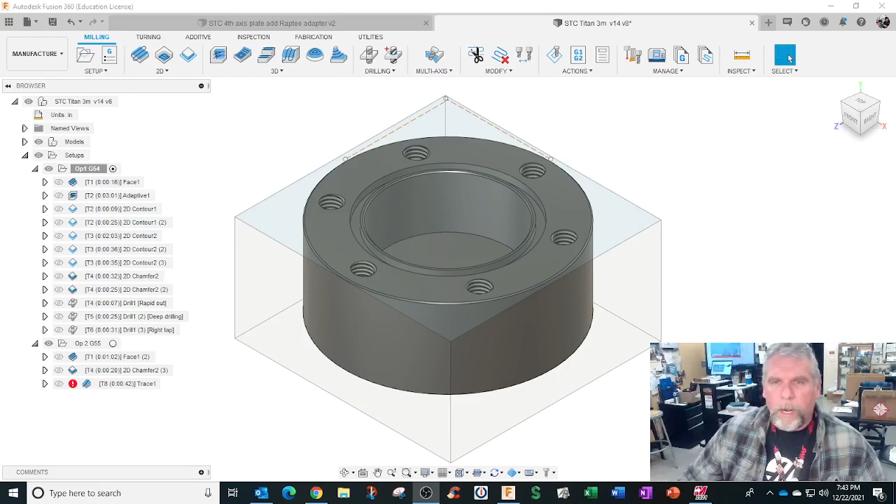Okay, I was going to do this as a screencast, but I have my video camera here and I was at school still. So I will demonstrate up here. I actually drew the material on this one, mostly for a discussion of the Titan method of material.

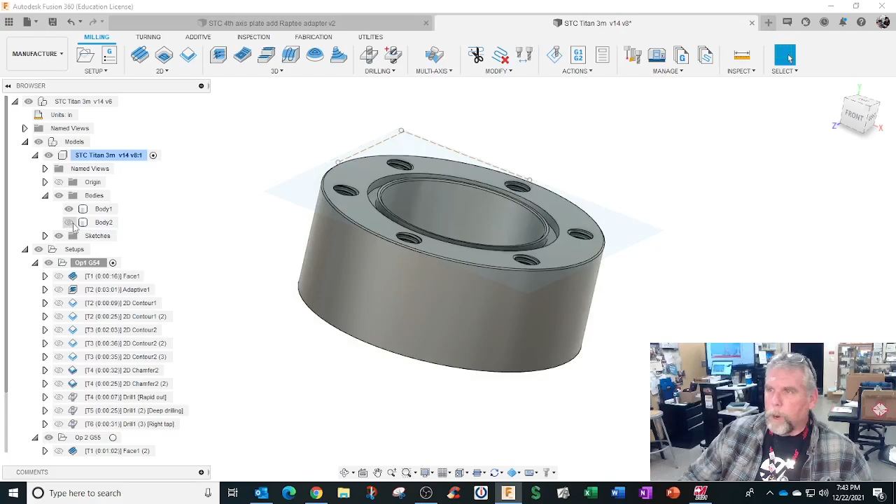So we got this body right here, the extra body. I'm going to just shut the sketches off in that body. So we got a round part. We can make this out of 1x2 material. So we got to edit the material, and you can do relative size or fixed box. And up here, I would put in the size of the material. So I'm going to use 2-inch wide.

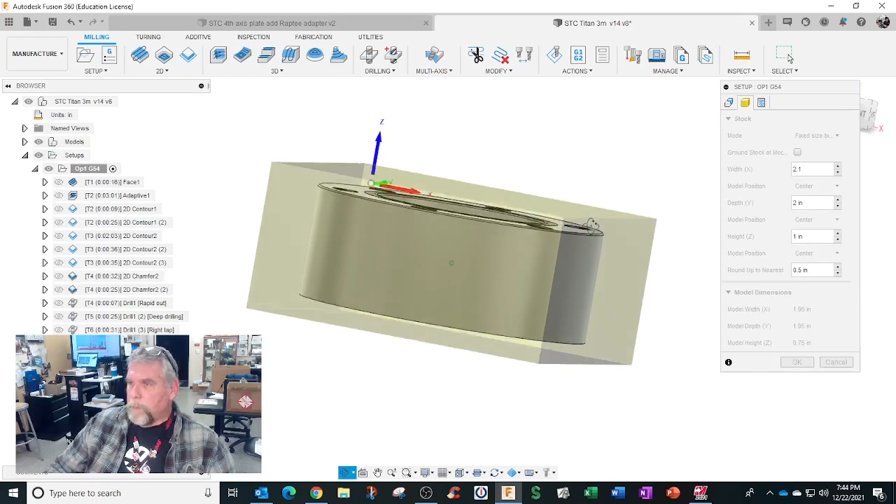Move me out. 2-inch wide, 1-inch tall, and I'm going to make it a little bit longer than 2. I'll make it 2.1. Even though this is round, it really shouldn't make a difference. And I usually make it so I have a little bit of material on the top. 10 or 20, 10 thousandths is fine. Which leaves me with 240 thousandths of extra material because the model is 750 tall.

That would work fine. I always do this last one here. I labeled it. I accept the program number, label it. Now I'll even call this WCS number 1. If you use 0, it'll default to G54.

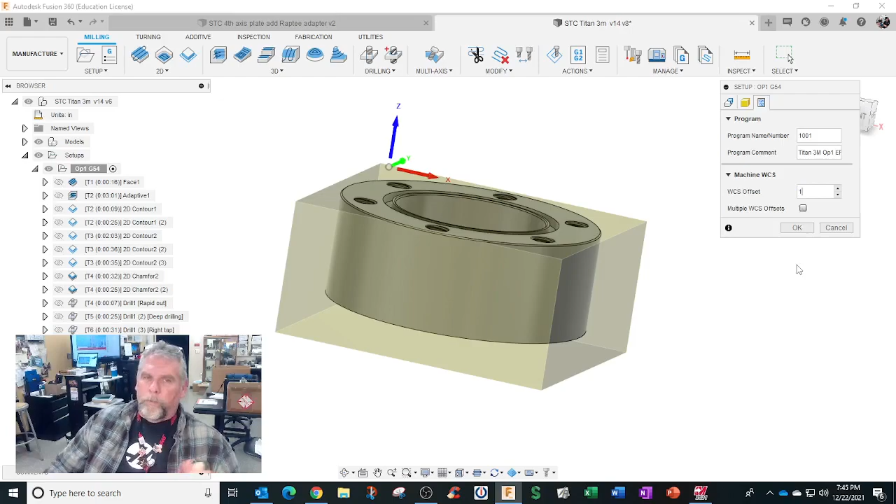Okay. Now for doing the Titan method, where do we put the XY? The easiest one is stock. Use the corner. The corner of the top. There's a probe that'll do all 3 in one shot. Place it over the top, cycle start, and it'll do the top, it'll do this edge, done.

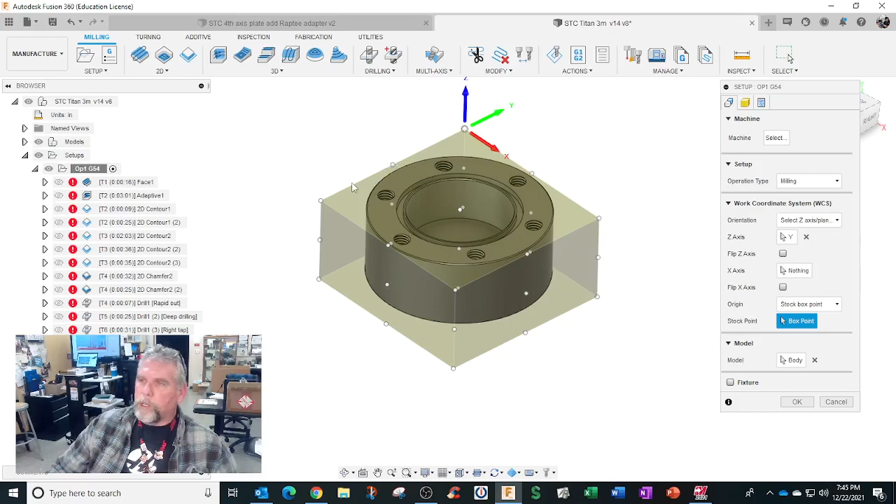I saved that probing program and I had it shift because I haven't matched the Titan sheets. It's working out good so far, but some people forget the shift and we end up with the left and the front barely cut and the top's barely cut. So the first operation is hard to mess up. If you use the stock and get enough material, I mean, the biggest mistake we have is people aren't cutting them long enough. But if you have the bar stock in there and it's big enough to do the project, that will get you right there.

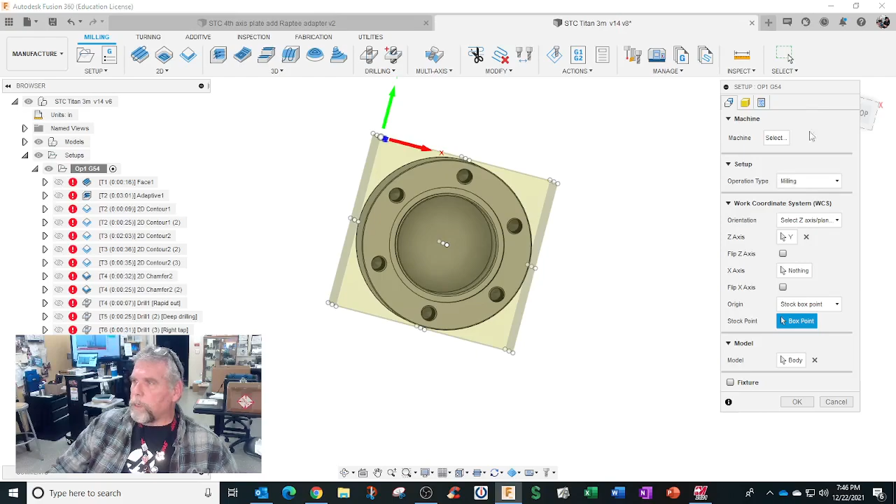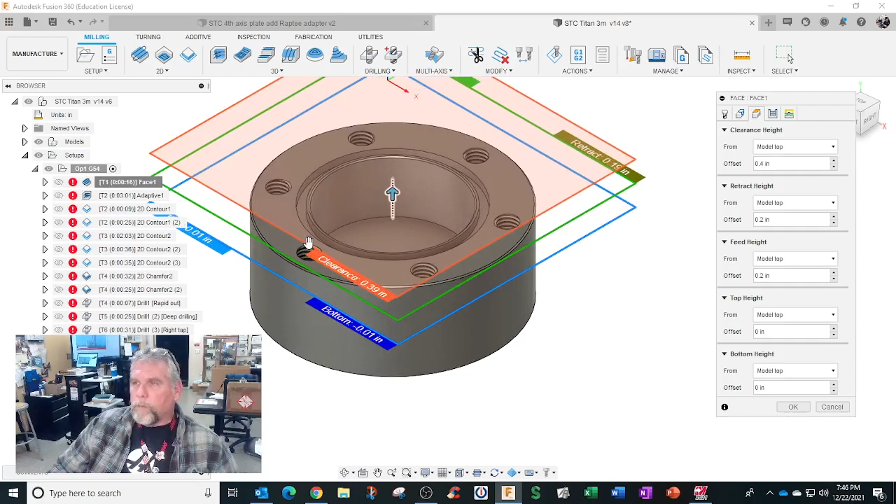Just make sure when they're looking at it. Now, for following the Titan projects, he's telling you exactly what, but we have enough room in there to make that part. So we do a face mill on the top, and Titan teaches all model tops. We do model top everywhere, and the bottom cut is the top. If you're using stock box top, and I have it shifted 10 thousandths, the top is 10 thousandths.

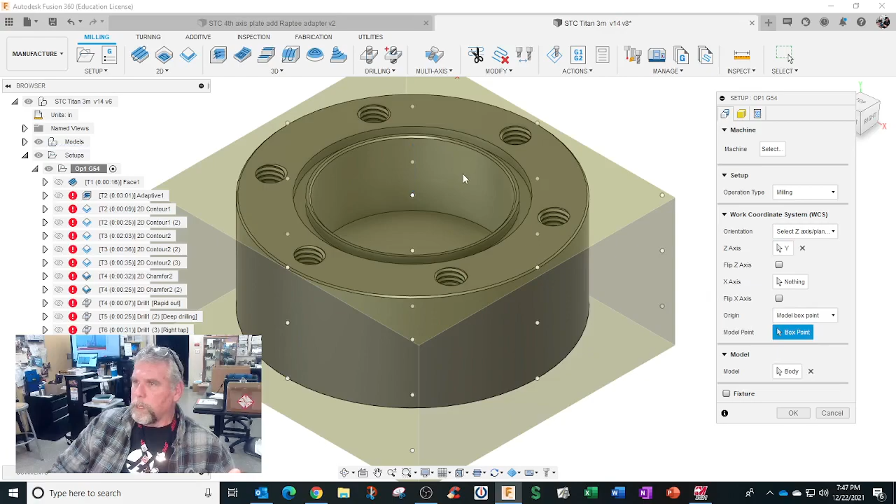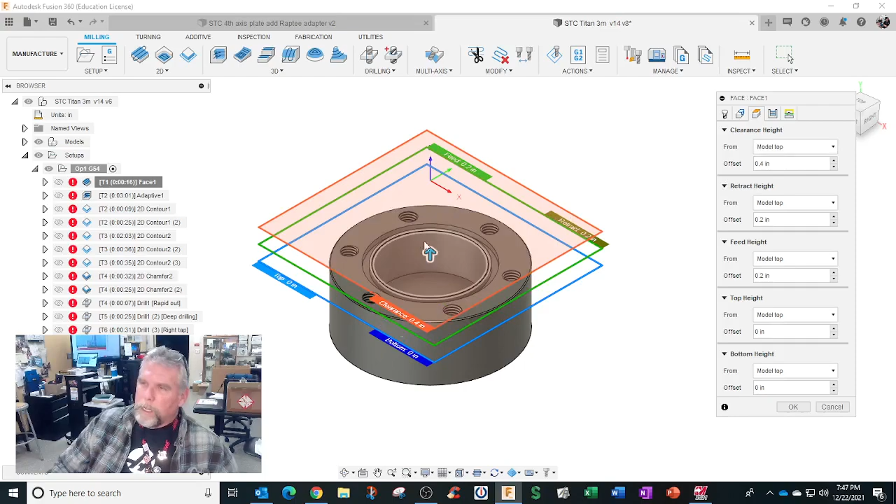I believe why he teaches it that way is the top will be Z0 in the G code. So there's pluses and minuses to doing it either way. So we do that one there and hit OK. Do the heights on this side. The model top is 0. Part will be Z0 in the code, and everything else will be referenced to the model. There isn't much on top, not much to worry about.

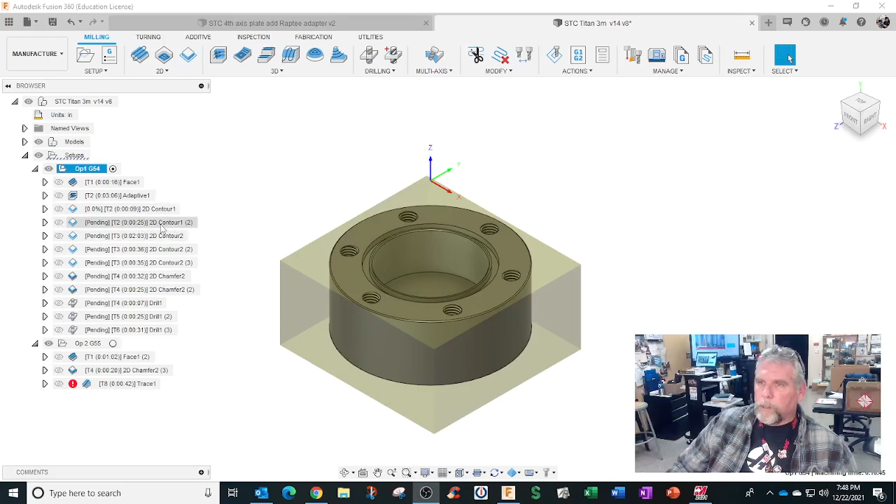And then we get all the roughing stuff. So I'm just going to regenerate all these just to get them done. So we use 3D adaptive. It's actually much better than 2D. It actually does pretty much everything for you. And it's not the fastest computer in the world. And this one here, we haven't chosen the tool that's supposed to be in there. Actually, this one I did before I gave them all a custom sheet. So this one I have to update.

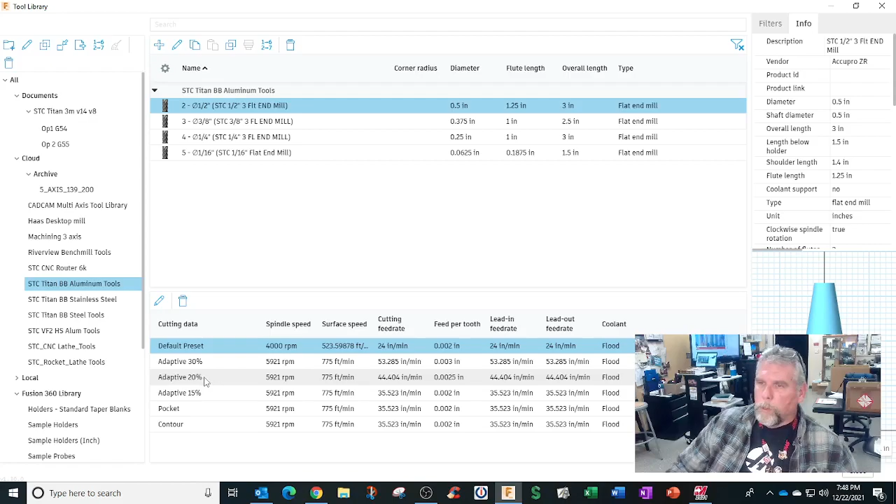Go to my library. Everything's in the cloud. Building block aluminum. I'll go get my mill, flat end mill, just to narrow down the selection. Say use 0.5 or ½ inch. And right here, these are my feed and speed settings. I could tell that older tool did not come from this library. So I told them in the TM1 machine, I'm going to update this one. We want to do adaptive 20. Nothing more than that.

It closed, but if they forget to do that, up here, I guess I didn't pick it. It went right to the tool library. I didn't pick it for this thing. Building block, ½ inch, adaptive, select, and now all the feeds and speeds are done.

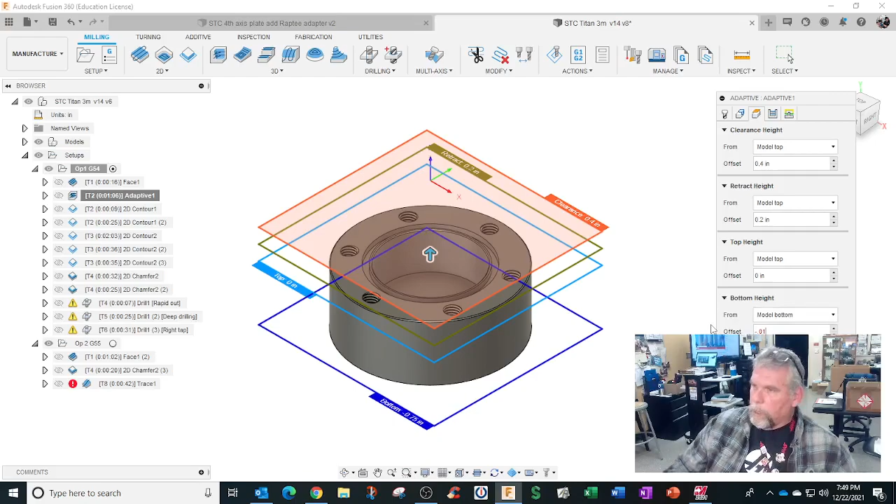We got the stock contours, rest machining. This is the nice thing about the 3D adaptive. All the heights of model top. We do model bottom and give it just a little extra on the bottom so it goes a little bit below the bottom. And we put stock to leave on here.

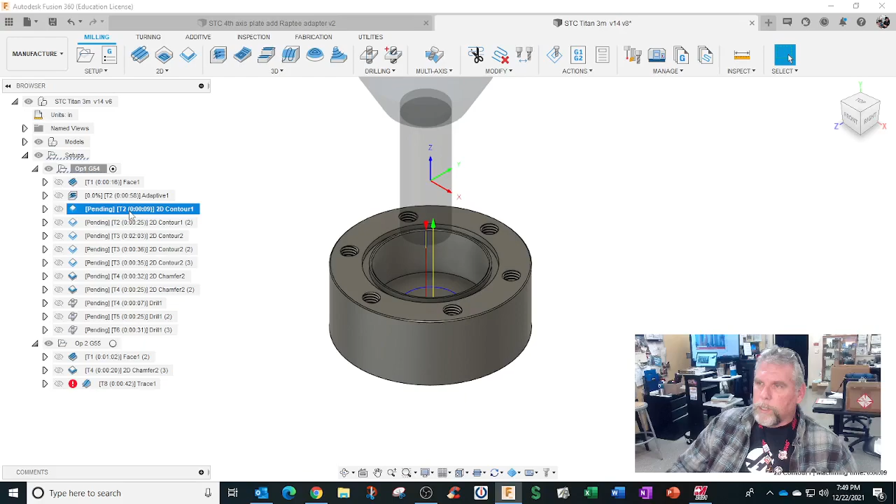And the way I have it set up, where the heck is it? Optimal load setting is based on 20% of the tool. This is kind of like an unknown area of this. Okay. And the other stuff is like same tool, and just go in and pick your feed and speed selection. So this one needs an update here.

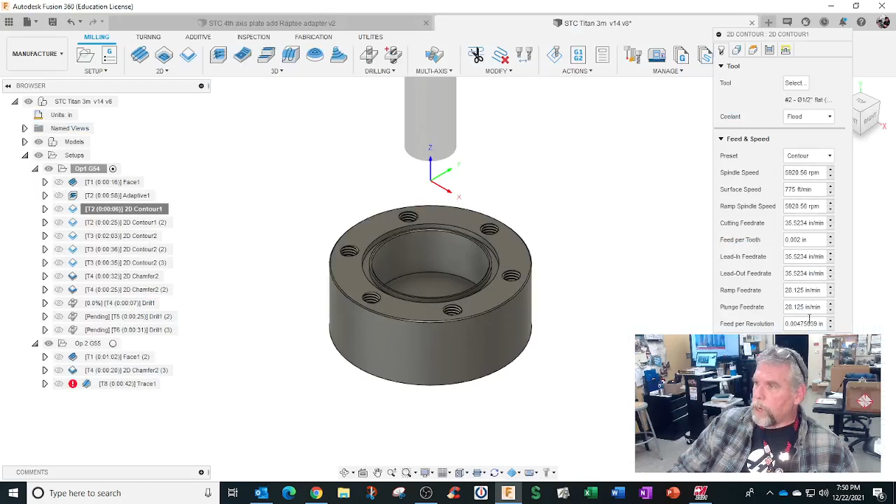I have two tools here now. I could tell the STC one is the updated one. I'll pick contour because that's a contouring profile. There's contour right there, the feeds and speeds master machine. So anyway, we go through all this.

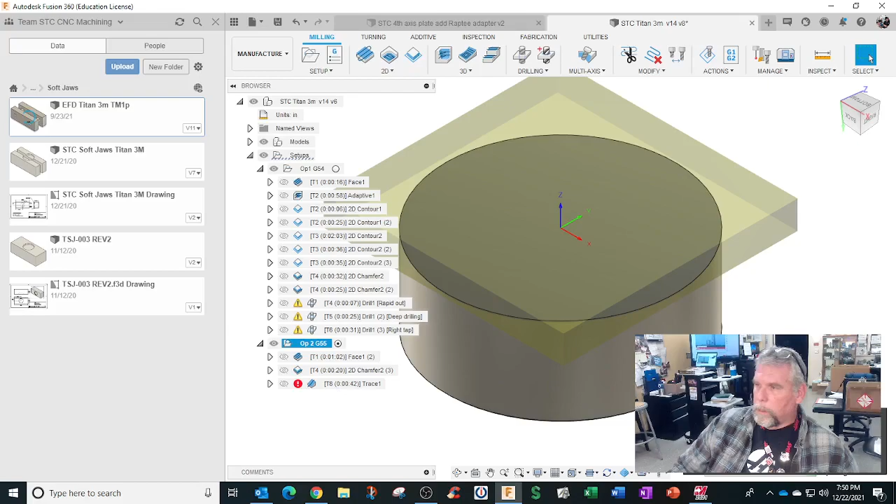Now let's talk about operation 2, which is in a round soft jaw. So we got soft jaws right here. Original Titan models and the ones that we made. Let's see if this is correct. This one here. Oh, this has the wave up to flip. Here's soft jaw. There they are right there.

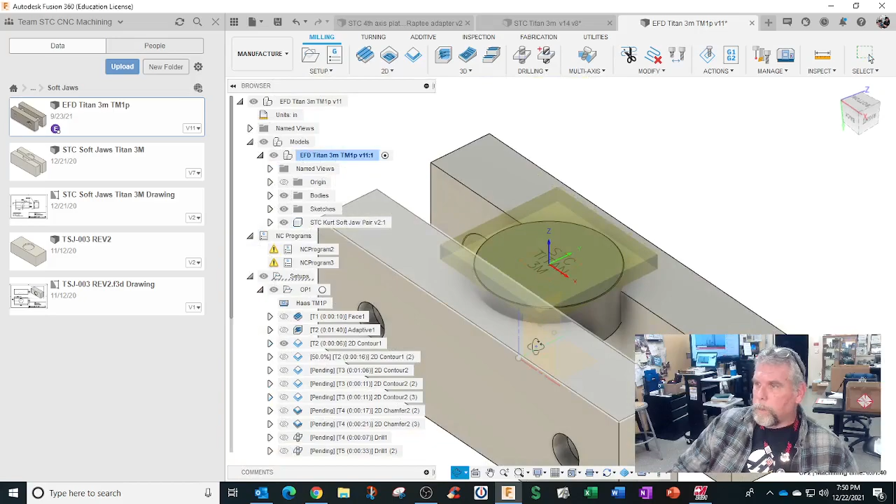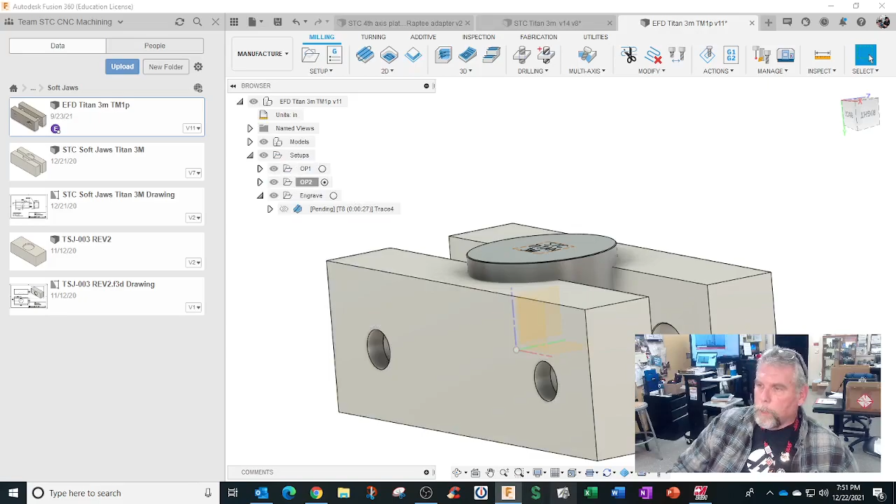I'm going to close up NC program. Okay, so this is like the whole enchilada. I got op1, and if you have this sync view with active setup, and you click right to the right of this one, it'll flip and orient to the home view of that operation.

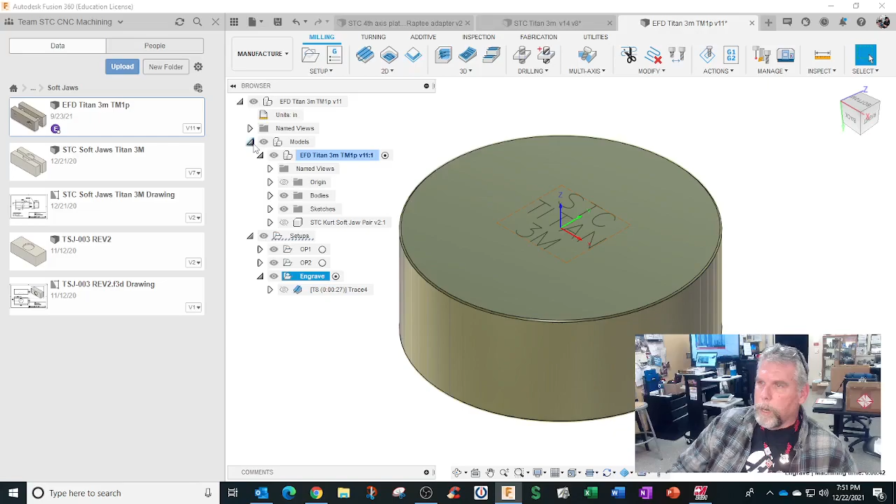I used to go and make all these multiple views. I don't need to do that anymore because now it's synchronized. If I click to the right of op2, it's already synchronized. We added engraving. This was just an add-on. Then I can turn on my jaws. This is not the soft jaw program. This is just bringing the jaws in. I shut the body off and shut all this other stuff off.

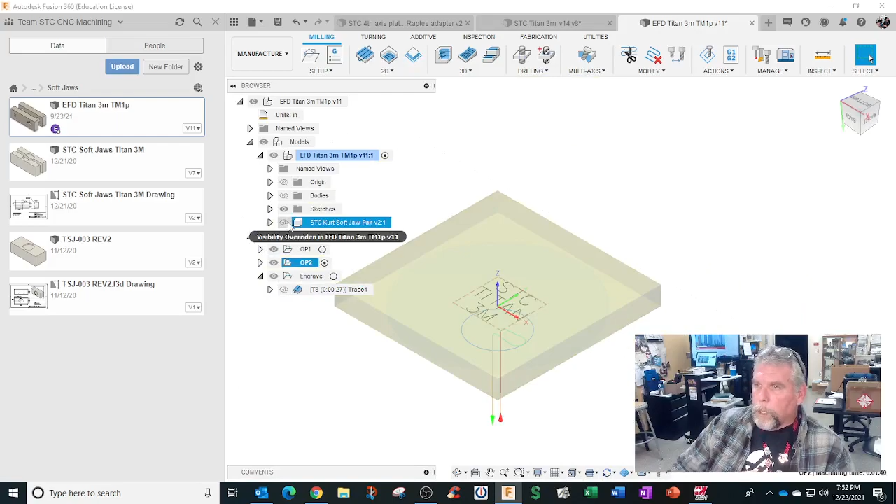The only problem is it's trying to put in the stock material. It's on. Well, I actually didn't cut the jaws in this one. I just did it for demonstration purposes. Let's see. Soft jaws. I don't think these are my updated ones. I have some on the shop floor.

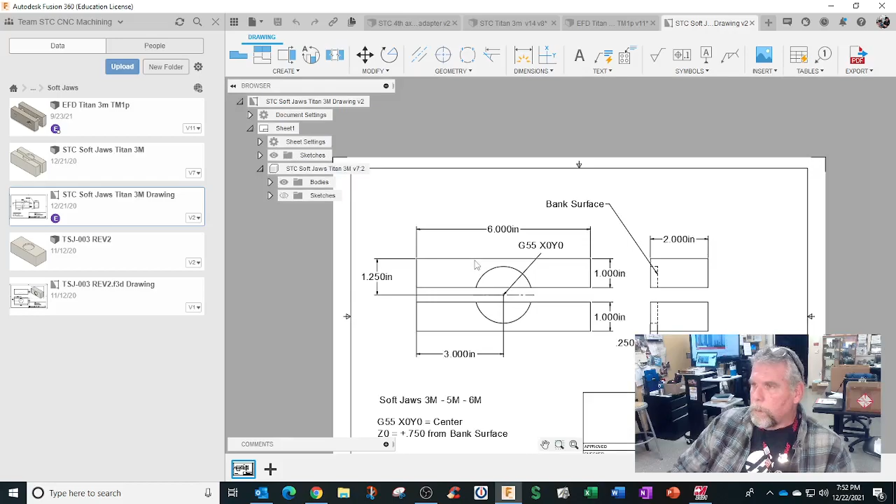All right. This is how we get to the jaw. Well, actually, we have ones with a bored hole in here, but 3 inches to the right, 1.25 down. So if you go probe the side of this and shift it to here, our G55 X0 Y0 is the center of the part. And we got it captured by 250. We made some deeper ones for all three that could fit in there. 5M needs to sit in deeper. And we say here, the Z0 is 0.750 from the banking surface.

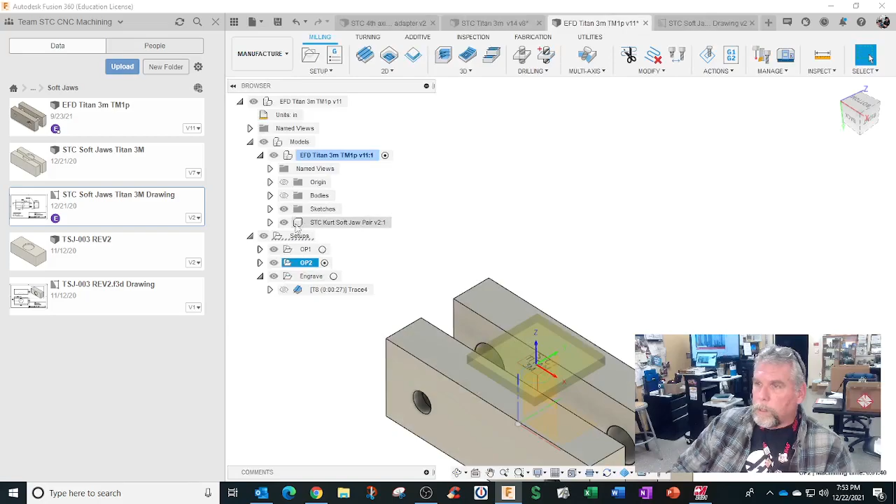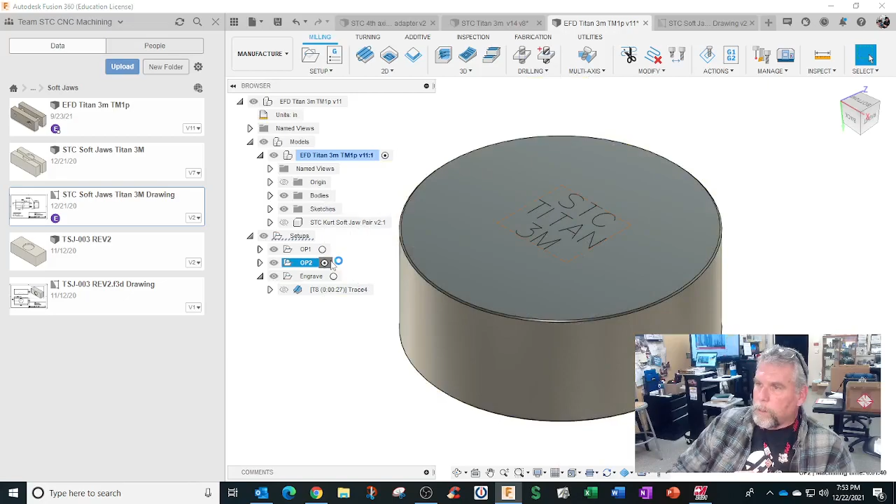Now, let's shut off these jaws for a second to turn the part back on. This is what I call my fake material setup. Right up here. And I do this negative 750, but you don't need to do that anymore because now it has from preceding setup, use rest machining. And when you click on this, you turn on stock visibility there. It's actually updated to reference the first side. So I used to fake the stock out. So that's really what you have on the second operation.

When you go to simulate, I get too many things open here. All right, I'm using comparison mode. The blue is extra material. The green represents finished model, and red means you cut too deep.

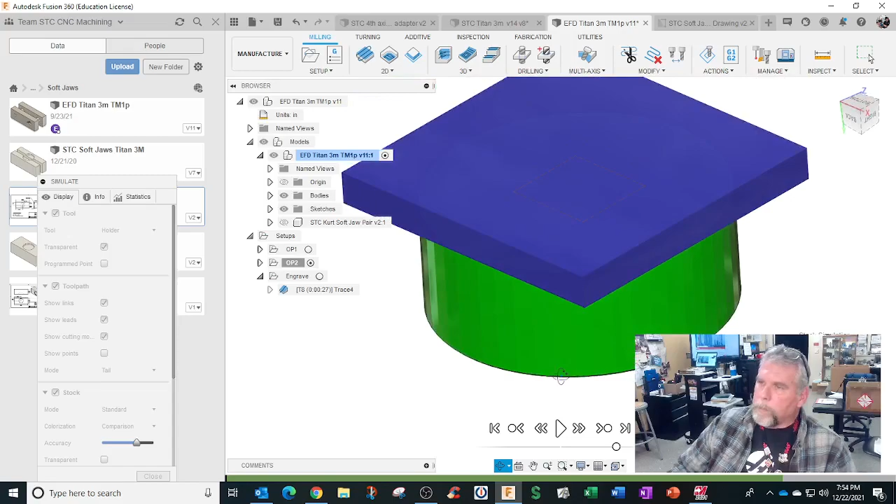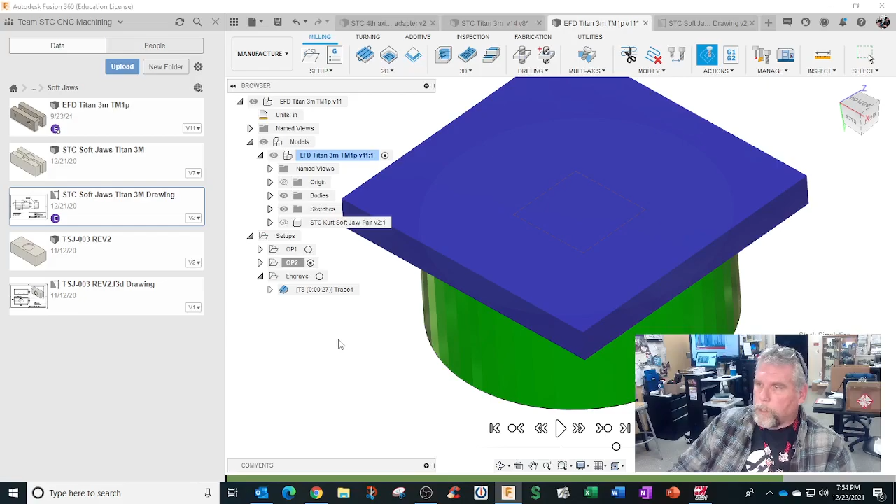I used to use operation all the time, so it would change color by operation. That's like a standard. We've really gone to this comparison method. You can tell if you cut it or not. So in this one, it'd cut the top. Let me back this up.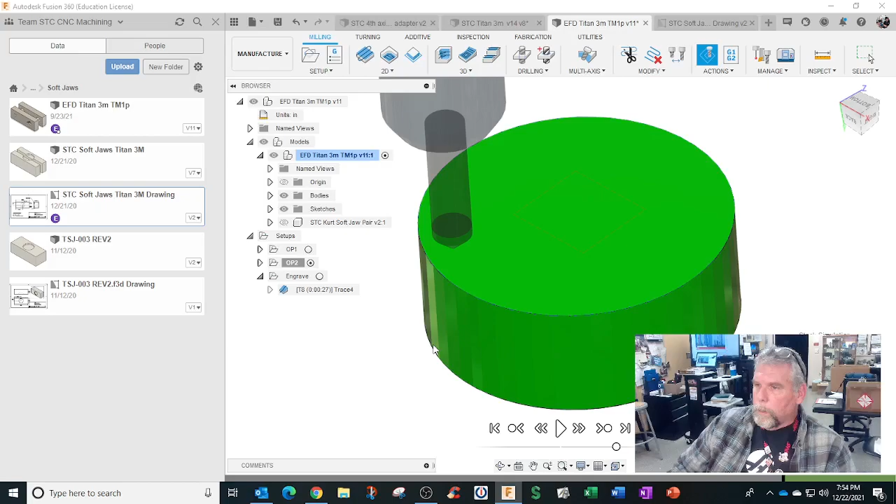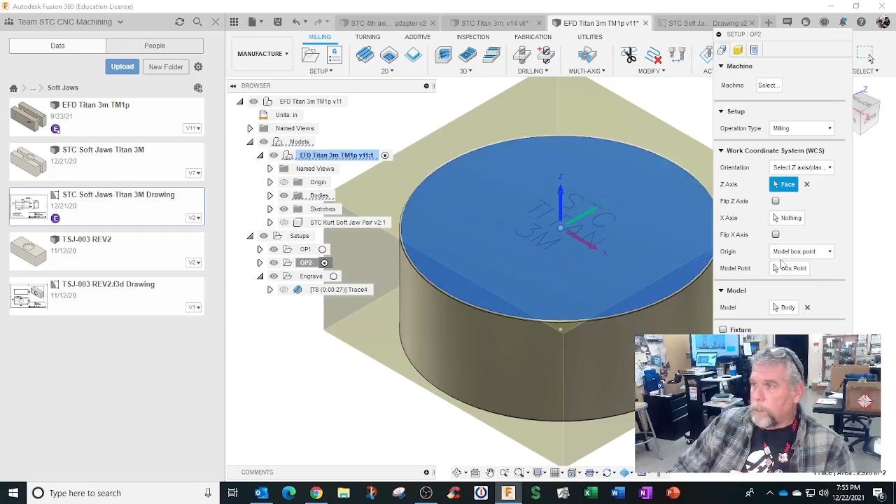Okay, my XYZ. So I set mine to cut off that stock visibility. Edit the top of the model box. Now, could I set it to the bottom? Sure, I could. I could set it right there. So when I go to set it up, I just need the center of this and the bottom. That's it. How do you find the center?

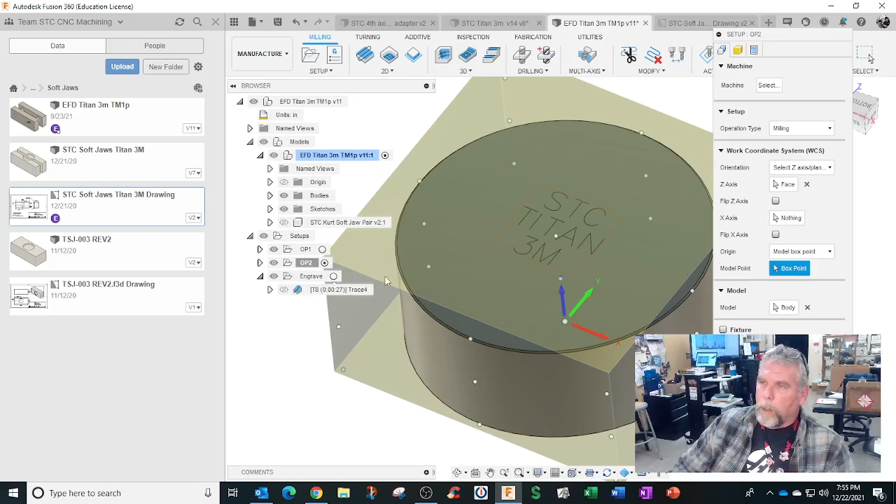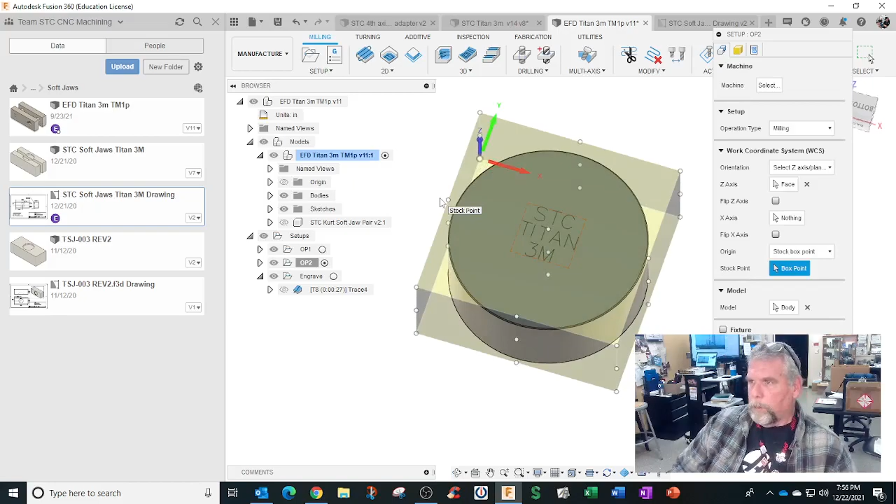This has no hole in it, and this big chunk of square material is going to be on top, so there's no way to get there. A lot of people think you can go from the corner there or down here, right? It's not accurate enough. Remember, this is raw material, and this will get you close, but not within thousandths or less than. You want to be accurate to a thousandth or less if you're going to make parts for aerospace or anything like that. Just making something that looks cool, it might be close enough.

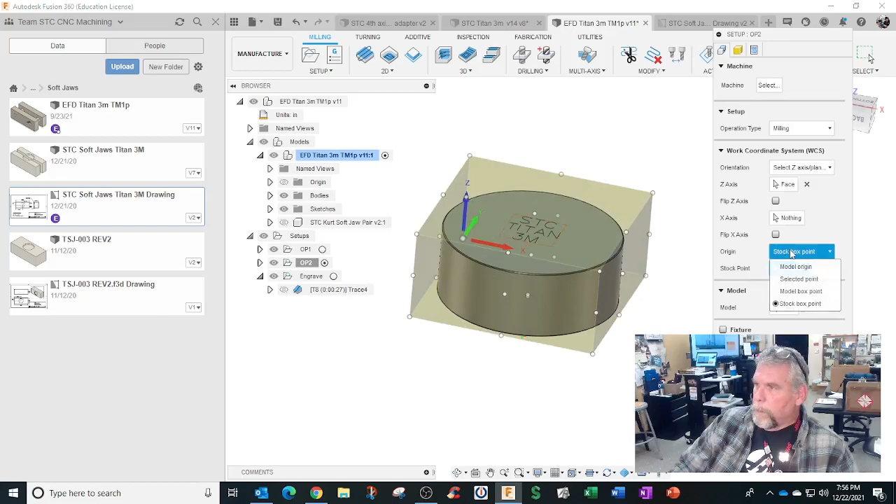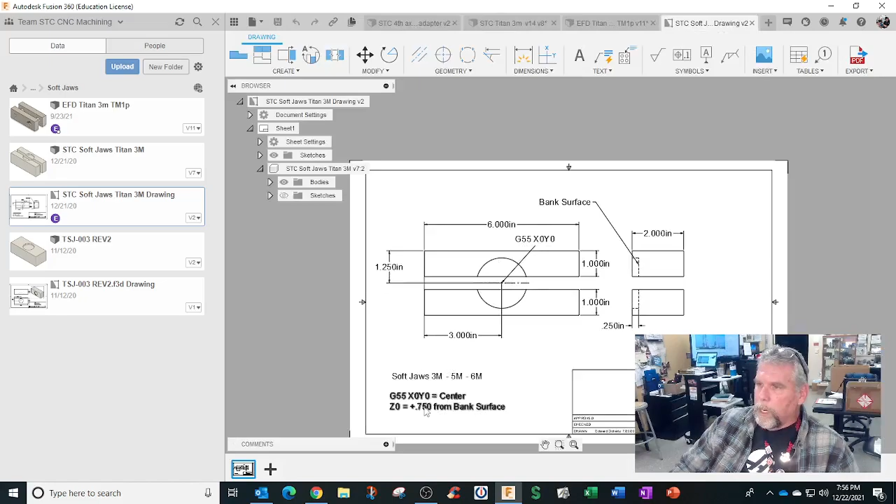I'll tell you what happens if you try to chamfer anything on the second side. A couple of thousandths is very visible. You'll see that you're not aligned to it. But if I did model box point, the corner wouldn't make any sense on a round object. So that's why we go center. You did that. Then when I probe the bottom, I'm done. Probe the bottom. So my plan of this one here, I would just say Z0 is bottom.

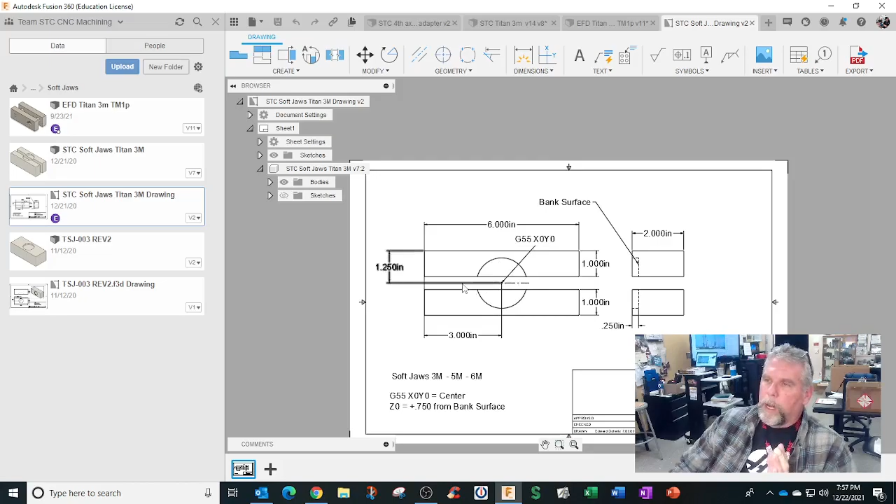Done. We still had to get from the corner here, or we would bore a hole here and write that it's 2.5 this way and 1 inch up. So it's like probe the center of the hole, and there's a lot of these soft jaws where we don't machine the ends of them. We bore the hole, probe here, and shift to the middle. So you try to pick the easiest way to do it, but at some point you gotta do a little bit of work.

But if you want them not to crash into stuff, like if they probe the bottom and they forget to shift up, then it might be a crash opportunity. That's why when we bring this down, especially on the first tool, I have them stop when they're about 2 inches above there. We're going to look at the distance to go and see what it says. If it says minus like 4, it's like no way that's going to make it. Something's wrong with that setup. We'll say, oh, I forgot to shift it up.

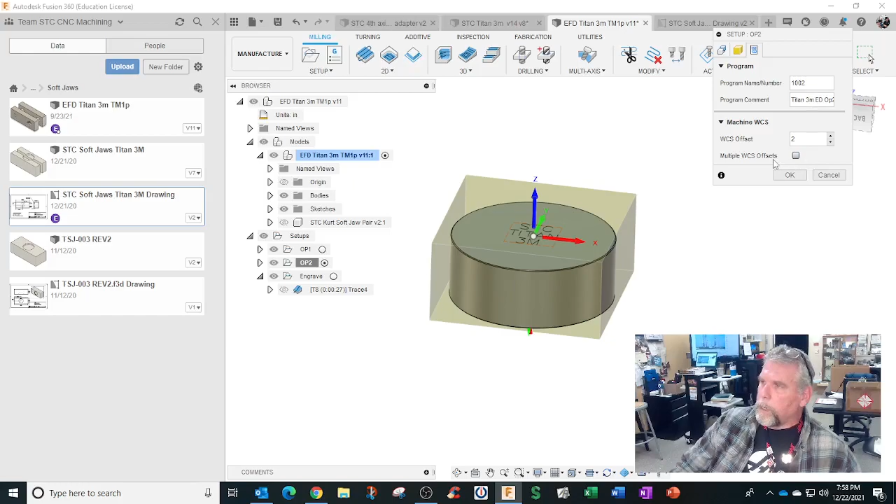So if you want to make it more bulletproof, if we did edit, I'd make this WCS 2, so I have 2 different setups, just in case you have to make another part, but I get them in the mode of how to make 2 operations and separate them. You can label it up here. It'll be WCS 2, which equates to G55. And if you want to use the bottom, and you set Z, you're done.

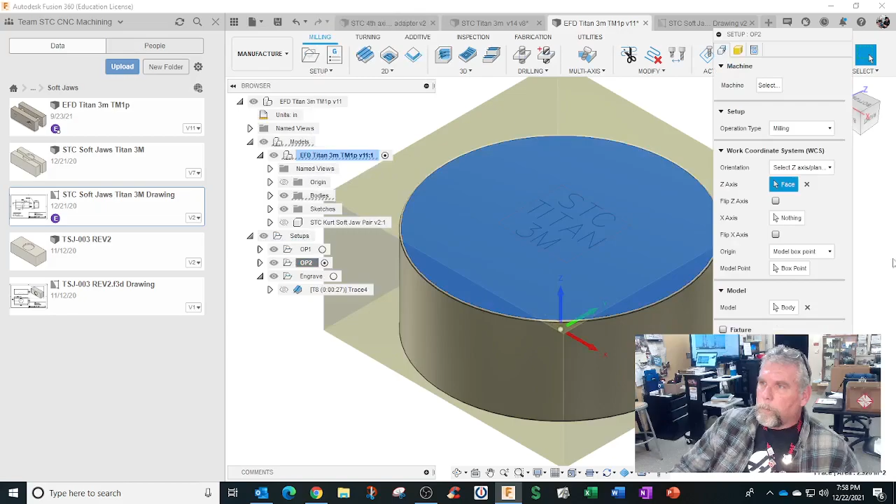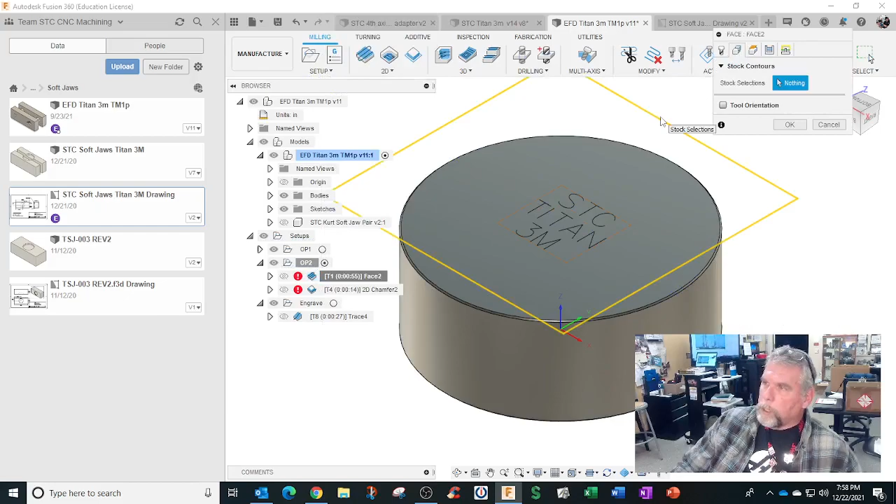So in operation 2, the other thing is you have extra material on the top. This one. And first operation is face mill. That's what we use. But you can use an end mill and like dynamic rough the top. We've done that on tiny parts before. So we use the stock that has been identified and the height. So we don't use model top. I make them do everything stock top except for where's the top, where's that finish line.

So in the program, the top of the part's going to be Z positive 0.75. A lot of people that were hand G-code guys would never program it this way. They'd always program it like the top of the part is 0. These would be all positive numbers till you get to 0. If you did like the top of the material down and made this some negative number, that's kind of getting off the beaten path. But in your G-code, that's going to be your positive number. And up here is going to be where you're starting from.

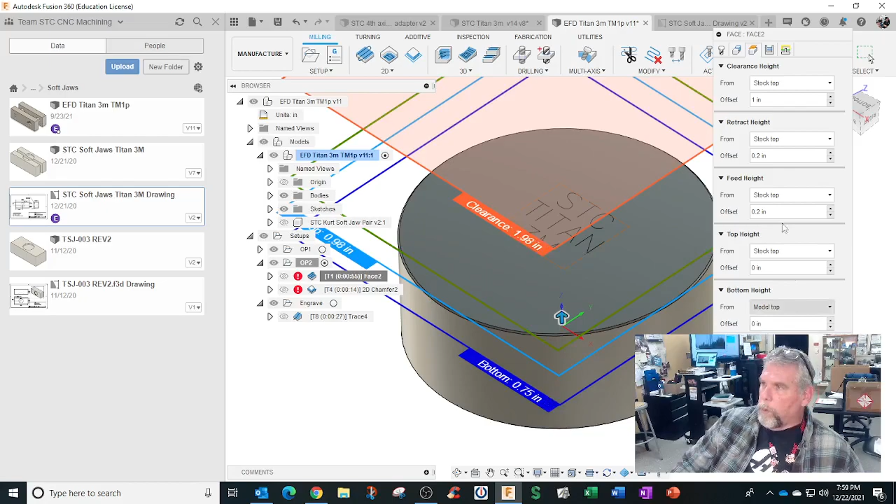And if you have the multiple depths turned on, and we do a finishing step like 5 thousandths, then plus you can control the feed rate separately. So we'll do maximum step down, multiple, or make them even step down, so they're all the same.

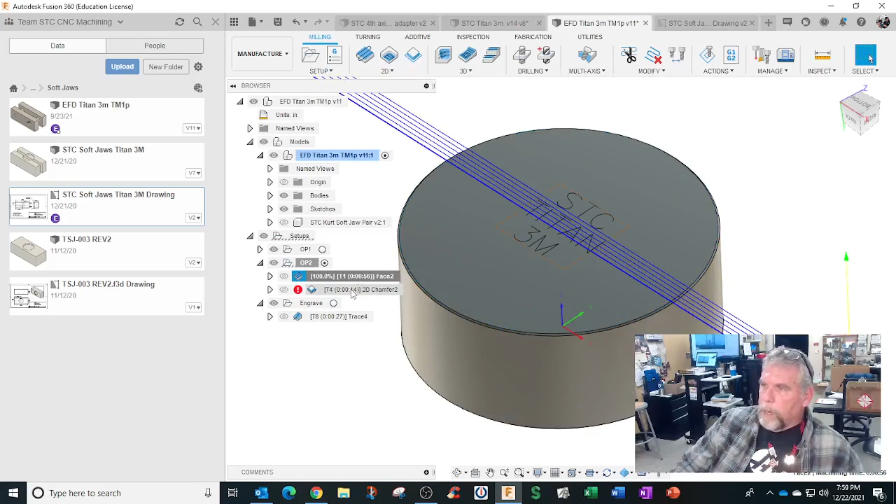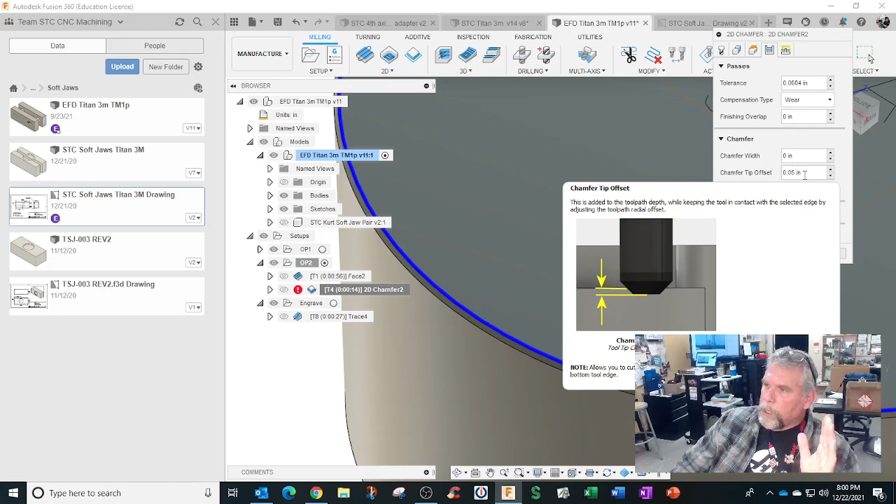Number of step downs. Now the chamfering also, to be aligned correctly, we can't go off the material. So the same thing here; all our heights are going to be model. We can use model top because we've removed everything. We got model top on the top, and our chamfers, if it's got a modeled chamfer, we put 0 here. This will get you a cutter compensation for adjustment, but we put tip offset, which is the down part. Plus these little tips come up. We use that as a standard setup, and we don't have to worry about clearing anything.

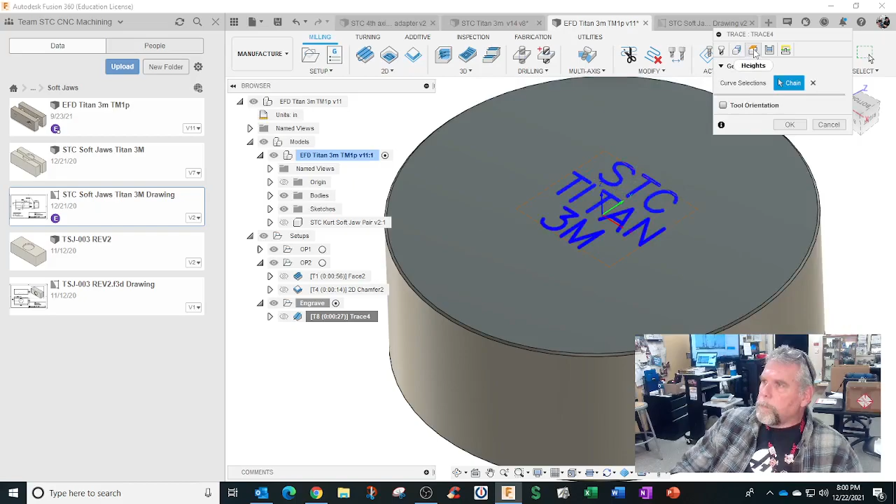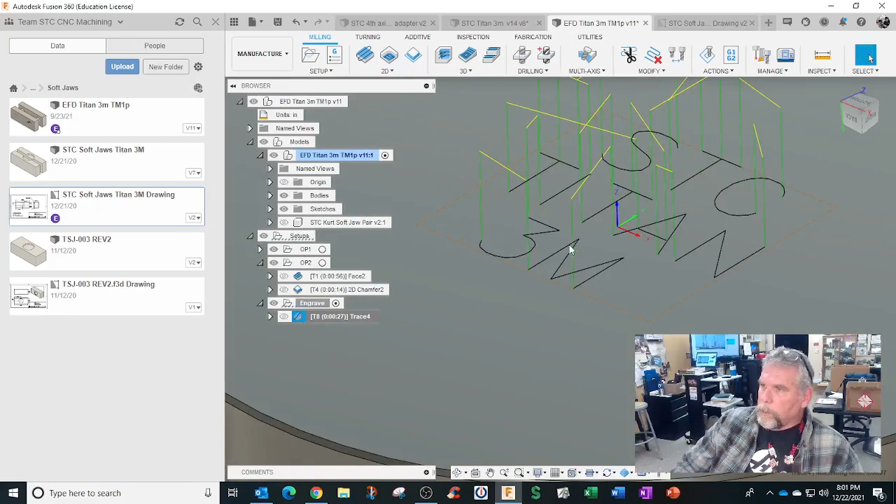And we always add in this engraving, so they'll put something in here, and we really don't use engrave anymore. We use trace. Trace is much simpler. Trace, you click on it, you're done. All these are model top. These will be the offset from the top. And here is axial offset. That's the depth of the part, right? How far the tool's going in. We always put it negative 3 thousandths, so we want no lead in and lead out entry. So that's actually just going to engrave those.

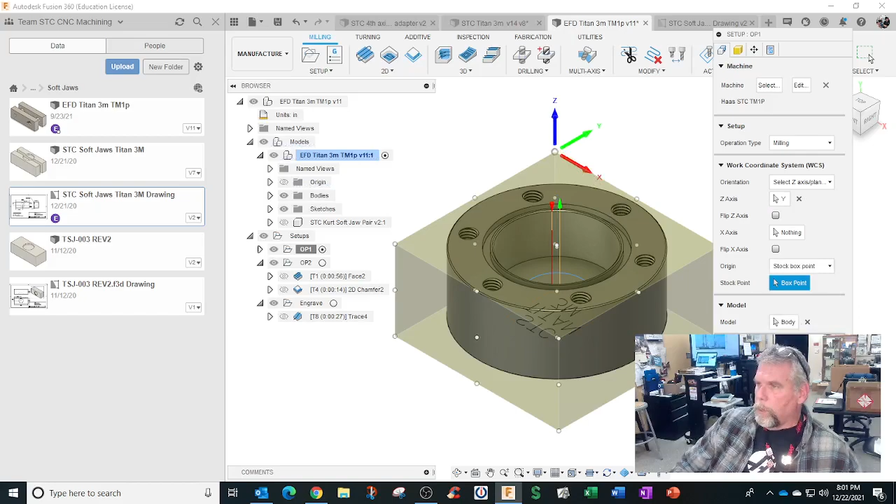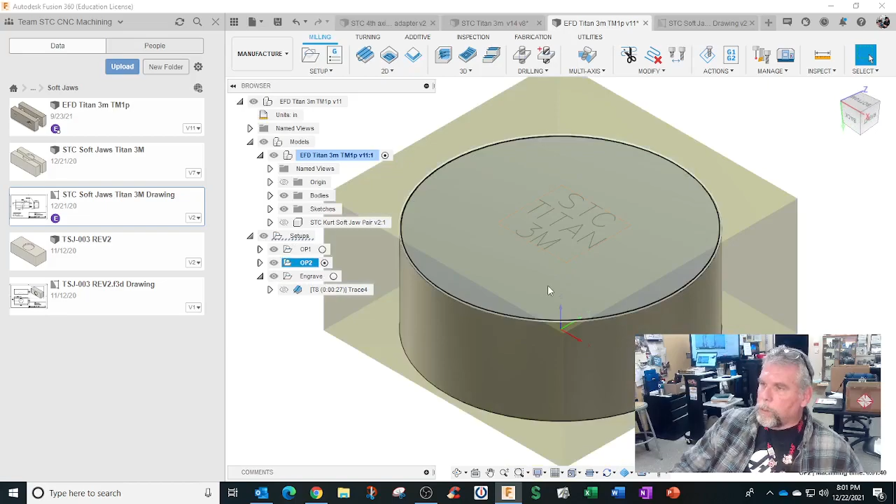So as far as where do you put the Z, you got op 1, you got raw material corner. Using stock box point is the simplest and really bulletproof method right there. Stock corner, set it up, set all the tools off the sensor, or if you're doing top of part with manual touch off, you'd edge find the corner and set all the tools off the top of the material, you're done. Operation 2, we want to be related to the model, so if you want to pick center of model and bottom, how do you find the center? You could do it from the corner of the vise jaw, but you'd have to have the same exact vise jaws in there. That's why we pick a known location and we write it down.

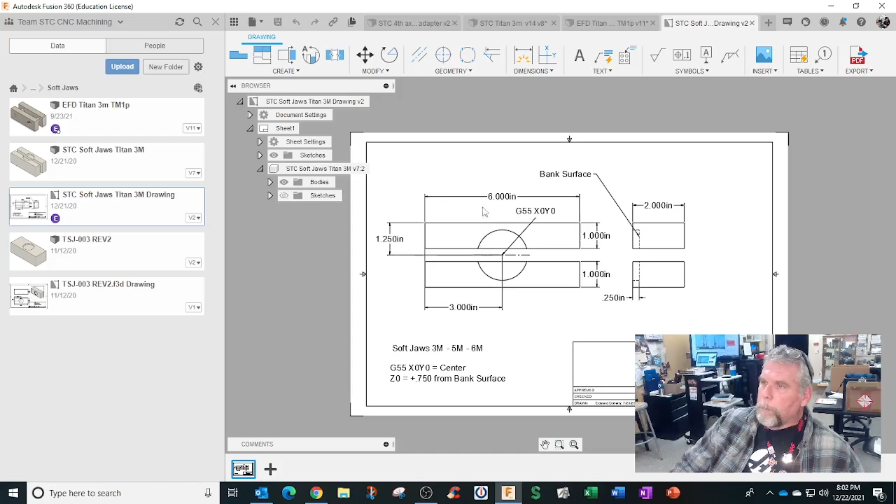We got a blueprint here. It's like a map, how to get to the middle. We spell it out here. This is where our XY0 is going to be. And we put it in here. Z0 is the bottom and shift up. Now you can put this as Z0 is bottom. But in some cases, if you have a round object in your part, you can get access to it. But you try not to plan around that. I'm just trying to plan if the part's rectangular and you don't need a soft jaw, we would just lay it in there.

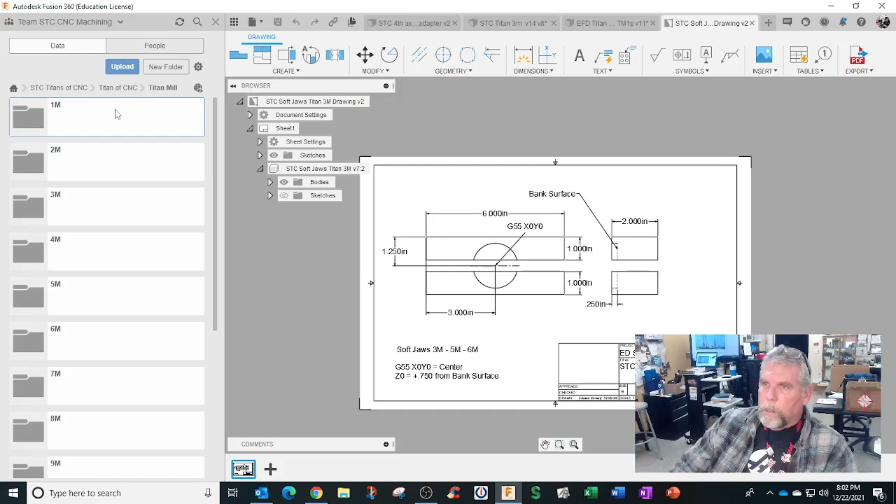Like this one here, rectangular part. The fastest computer here.

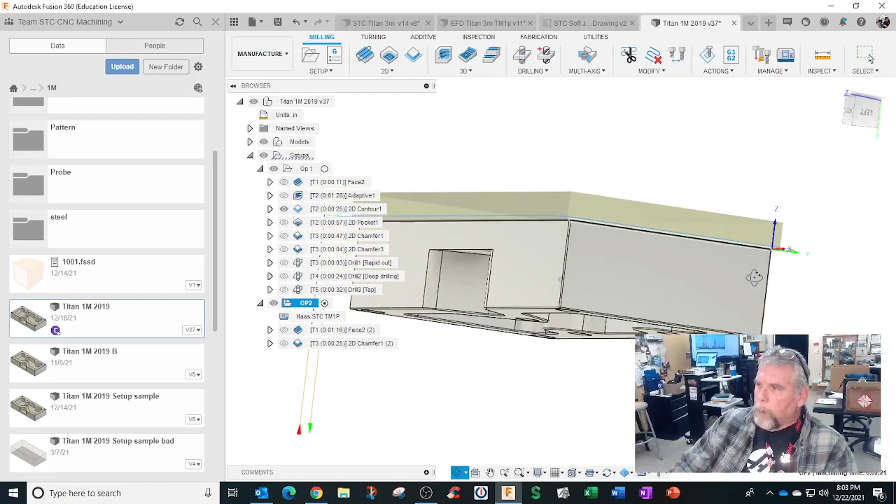It's a rectangular part. Our operation 2, got operation 1, which is the upper corner. Technically, in industry, you want to be related to the datum, so we use the opposite corner. Not really necessary if you only got like one vise, but we're aligned to the corner. So all we do is we put a 1, 2, 3 block in there, probe this side, this side. You can't use the material because this is hanging over here. You can't probe that. It's unprobable. We put in something to simulate it.

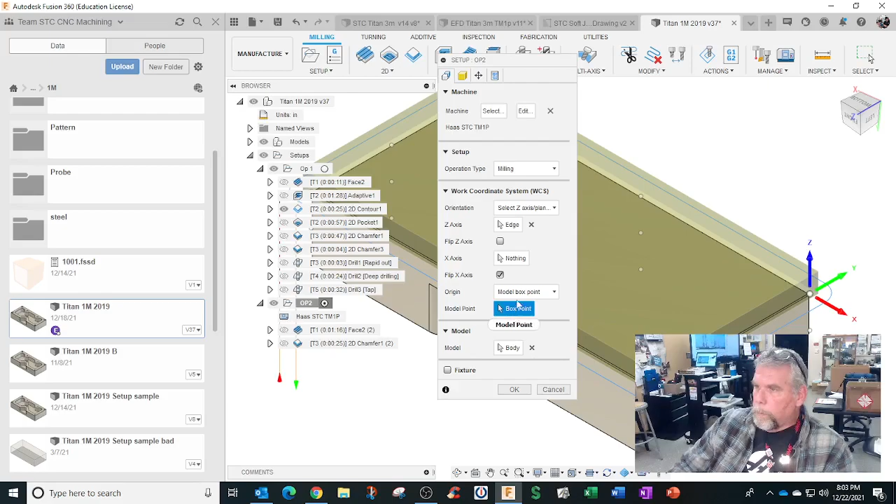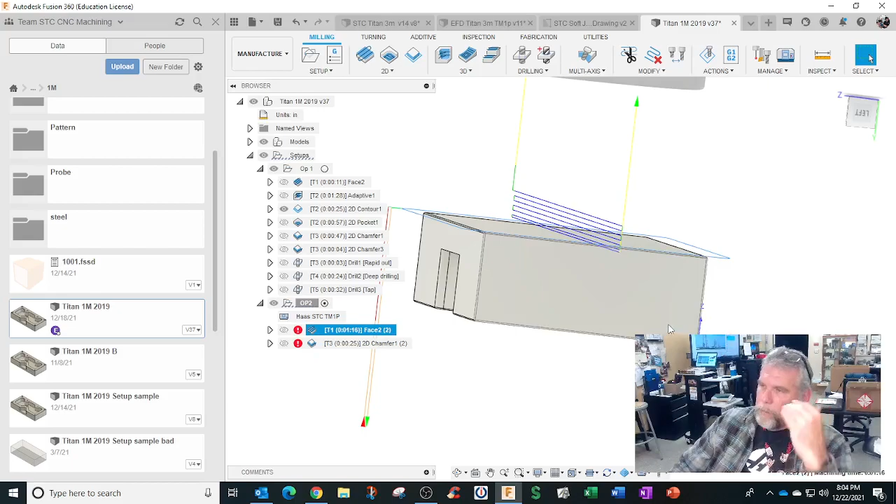But if I wanted to change it to bottom, pick the bottom corner right here. Oh, small. That would be my bottom. It's still the same face cuts. They're all relative to that area. Only I like doing it quickly with the skinny parallels down here, and the ball is bigger than the flat top. So I put a 1, 2, 3 block and probe the block, and I'd have to shift down to here. We're just shifting to here. So at some point, you got to think of shifting. That's my take on all that stuff.